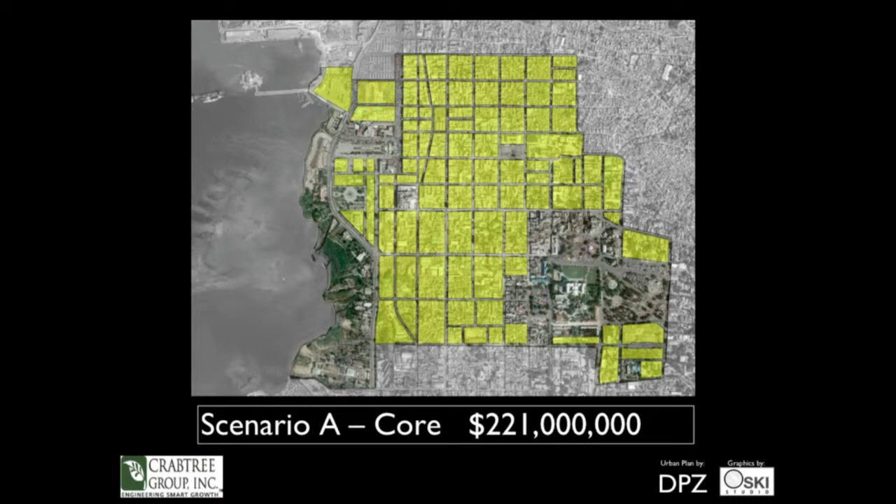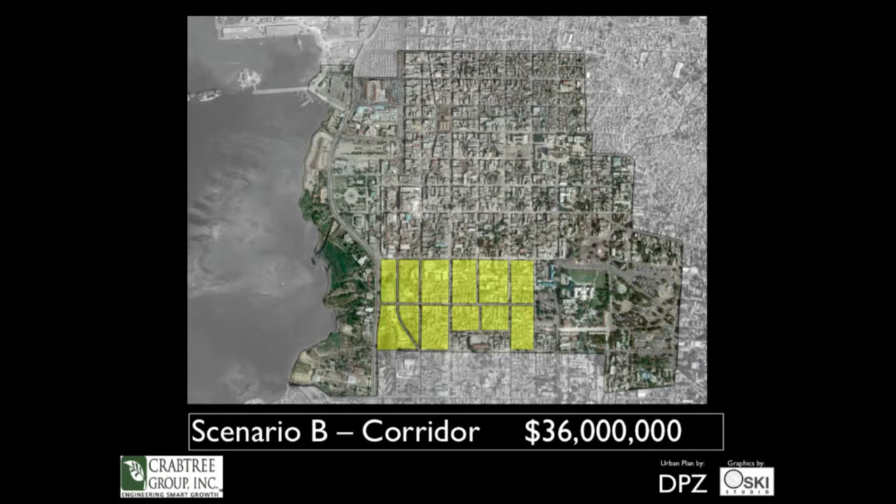We looked at 3 different scenarios, and the first one was looking at the entire urban core of downtown Port-au-Prince, and completely and immediately replacing all of the infrastructure in that immediate core, and the price tag for that was $221 million. The second scenario was to look at just a corridor at a time, and the cost for that was $36 million.

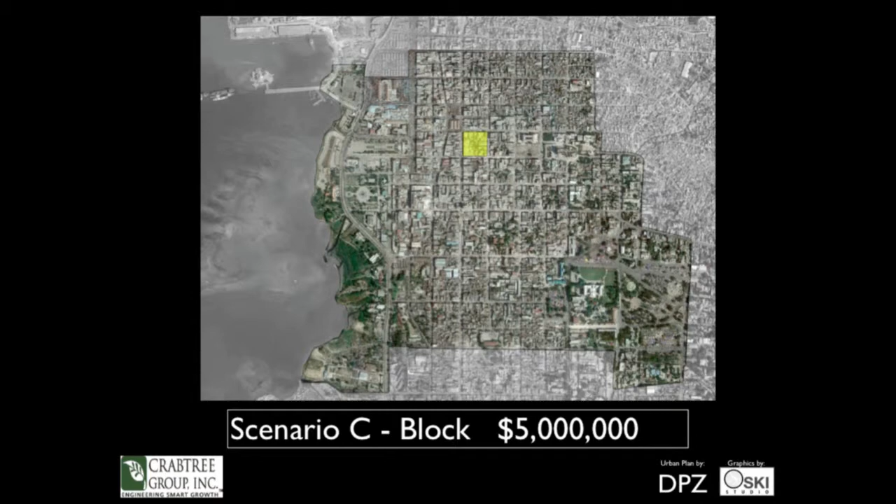Then we looked at the scenario of doing 1 block at a time, and that is, what would it cost to provide self-contained and secure infrastructure, including power, water, wastewater, and drainage for 1 block at a time, and that would be including the perimeter streets, and that was $5 million per block.

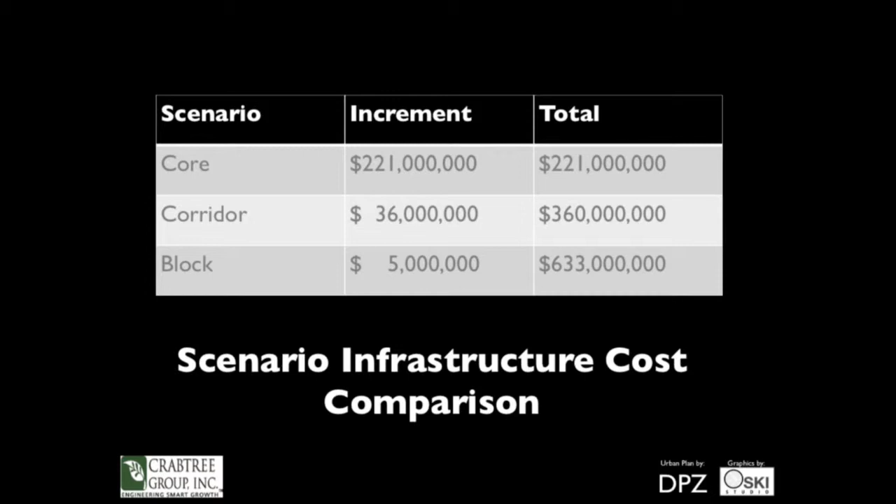So we did a lot of number crunching and comparing scenarios, but in summary, the core scenario was $221 million. The corridor at $36 million per corridor would total to $360 million for the entire project area, and the block would total up to $633 million. Now the preferred scenario was the block scenario, despite these vast differences in total cost.

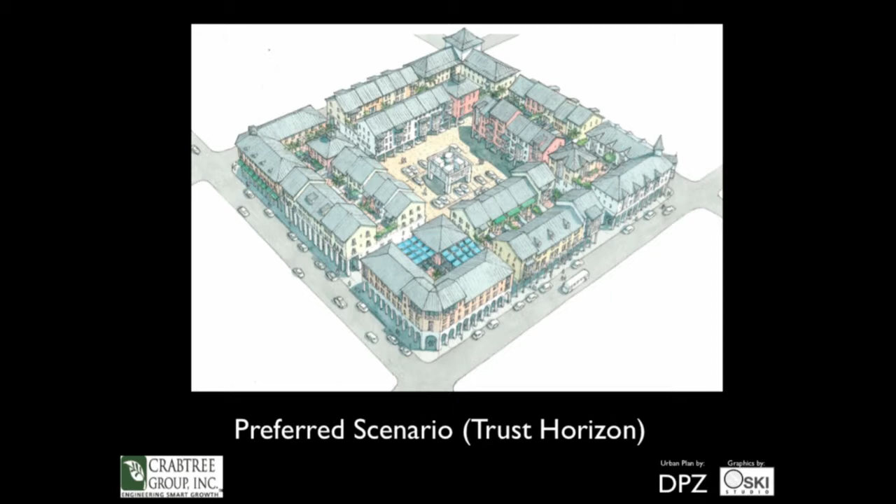And what it included was what we call the green machine in the center that provided all of the infrastructure for that block. And there's about 300 units there. Now the stakeholders liked this scenario because they had trust issues with trusting their vital infrastructure services to a sometimes sketchy government. They also liked the idea of the block as an increment that could be self-organized. And additionally, they thought that the ability to secure the perimeter of the block was an essential attribute of that plan.

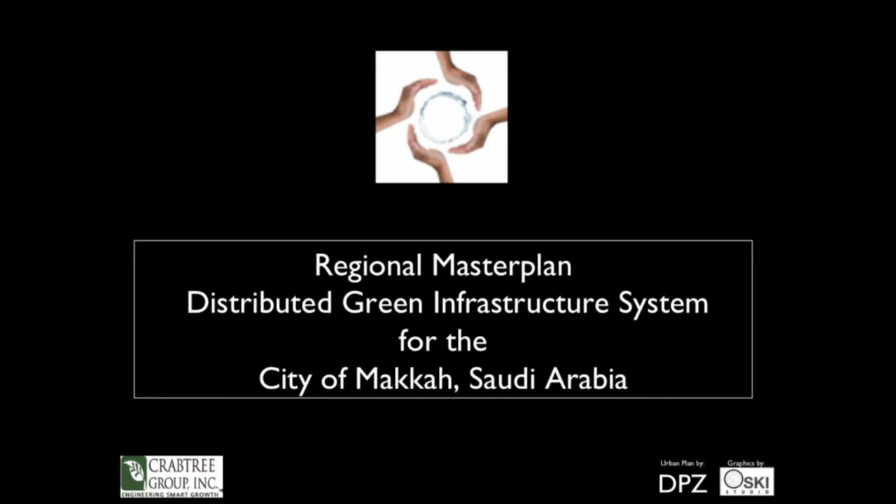Meanwhile, far away in Saudi Arabia, the city of Mecca is experiencing extreme growth pressures and severe housing shortages. And as a member of a DPZ-led team that was commissioned by the city of Mecca, we worked on designing distributed green infrastructure systems for a very large regional plan. This 100 square kilometer addition to the city of Mecca is designed to accommodate a population of 1 million people within 20 years.

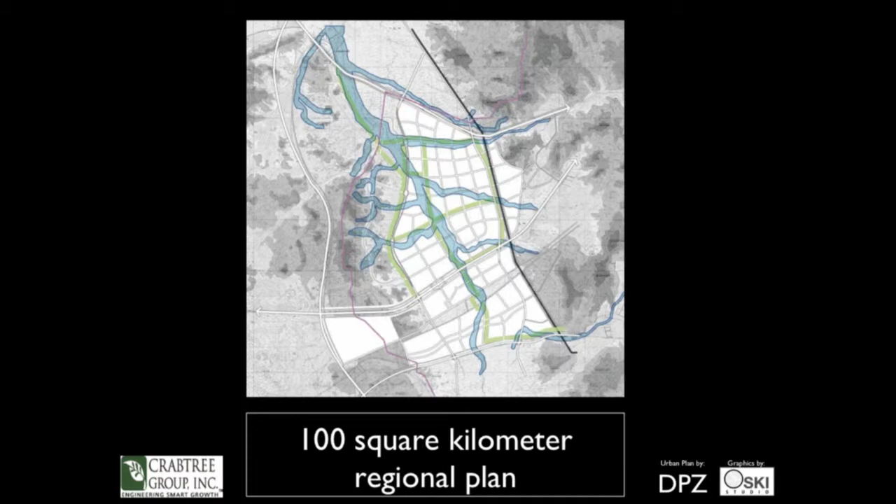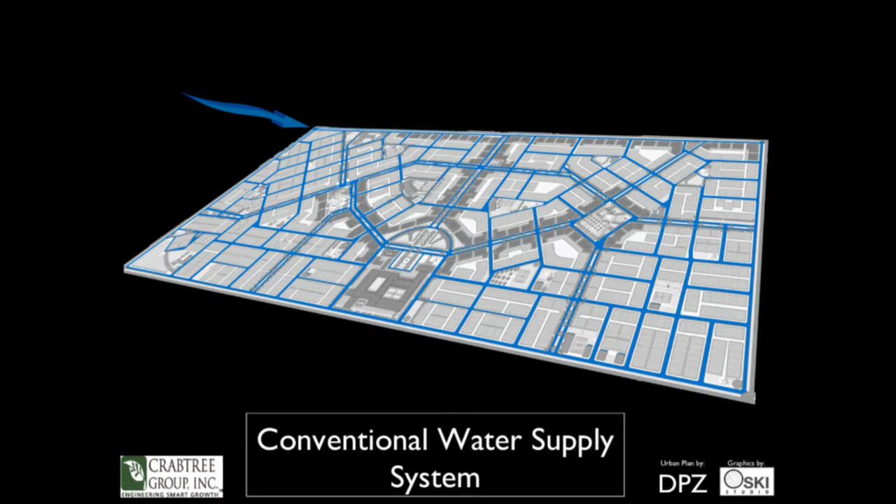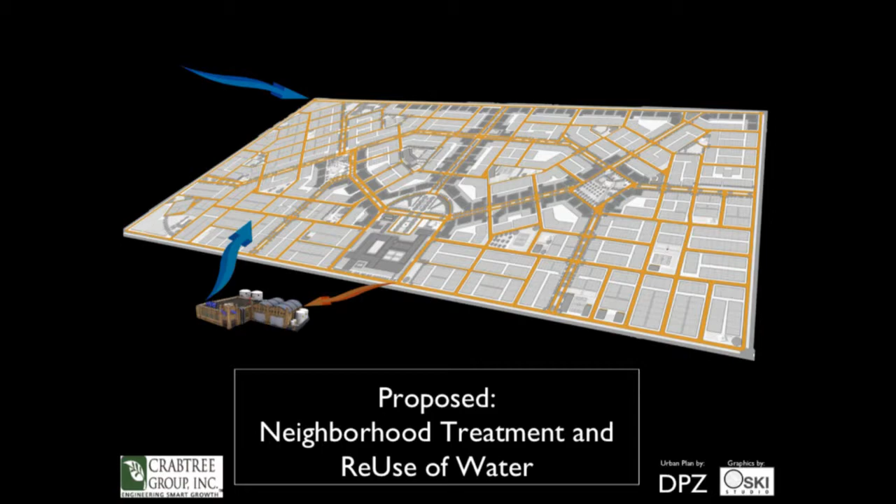And the water supply for this area is desalinated water from the Red Sea that is pumped dozens of kilometers uphill to get to the city. And the conventional wastewater treatment is for all neighborhoods to pump their wastewater to a central treatment plant, and then dump the treated water in what's called a wadi, or a dry creek. What we proposed was neighborhood treatment plants that would treat the wastewater locally, and then it could be reused in the neighborhood.

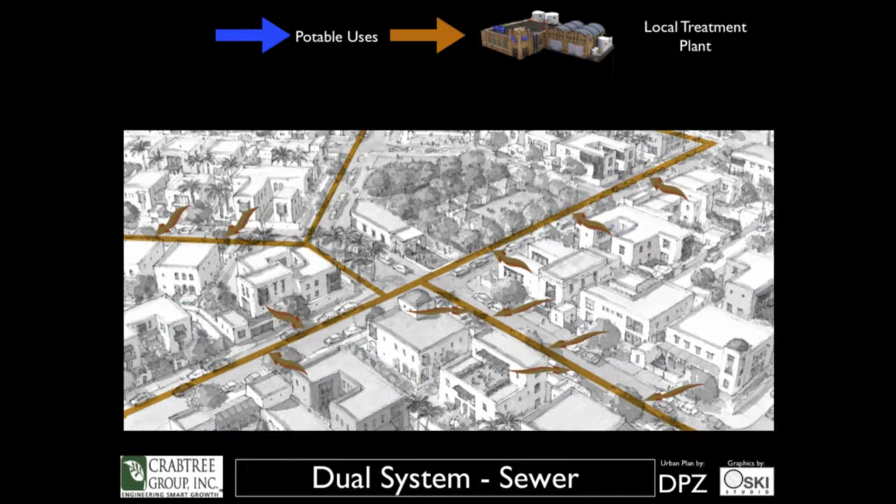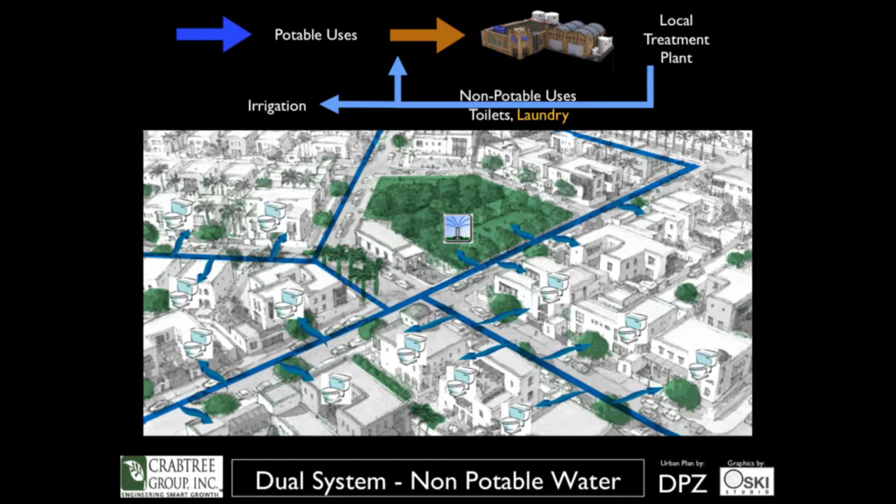So here it is: the desalinated water is used only for potable uses. The wastewater from those potable uses goes to a local treatment plant where it's treated and then returned to the neighborhood in a second pipe system for use in toilets, laundry, and irrigation. This results in a 55% reduction in the use of desalinated water.

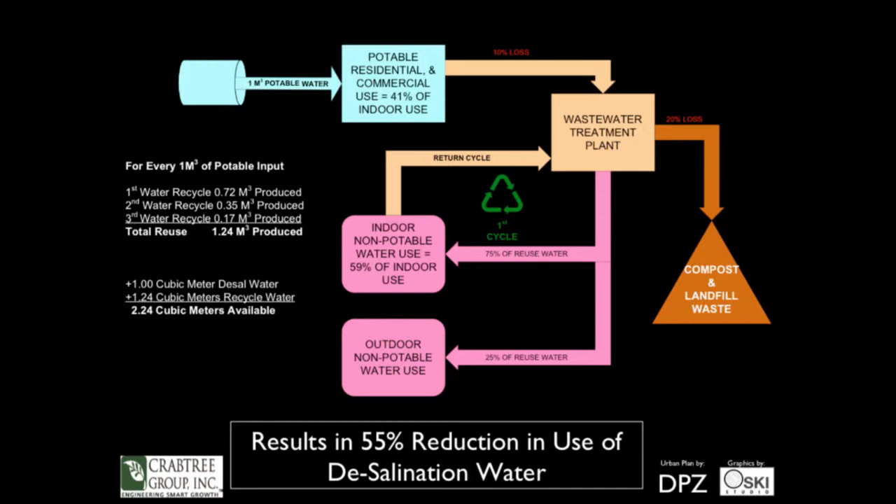We developed a rainwater harvesting street that would further enhance the water cycle. This is an inverted crown street that has bioswales at the edges and a French drain in the center that infiltrate the rainwater to recharge the aquifer. Also, this inverted crown street has enough hydraulic capacity to obviate the need for expensive drain inlets and pipe culverts.

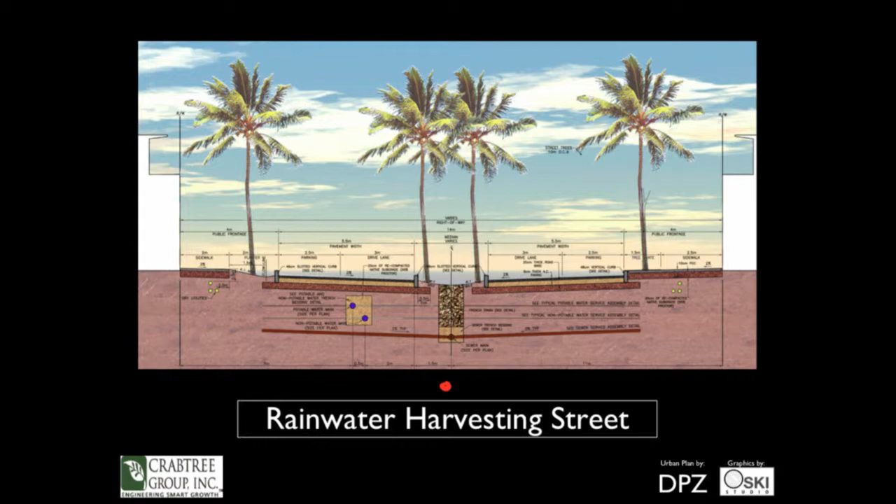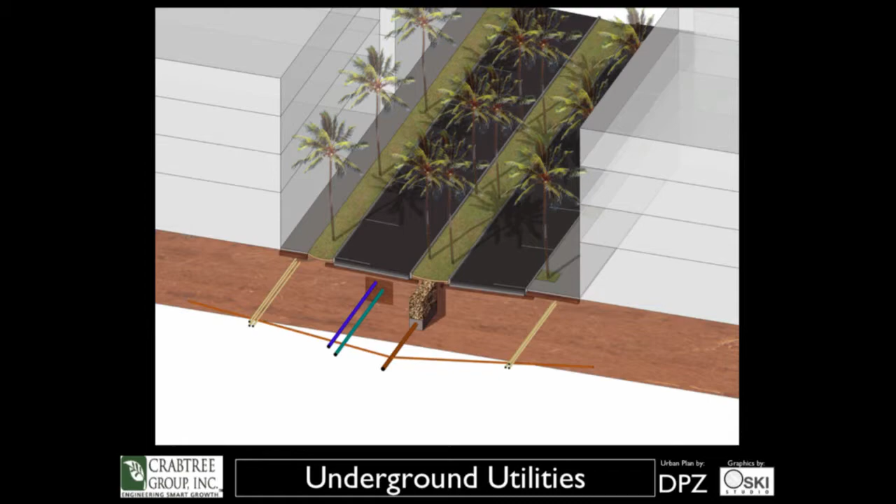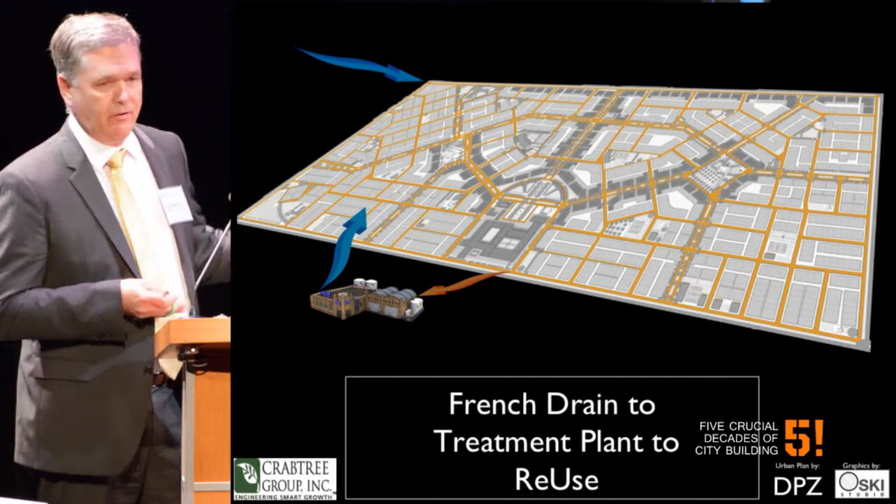So in this cutaway view, you see the dry utilities at the edges, the two water pipes, the sewer pipe at the bottom, and the French drain in the center that actually can be built quite inexpensively because it occupies the same trench that was dug in order to install the sewer pipe. Now, any rainwater that doesn't infiltrate into the aquifer can actually trickle down to the treatment plant where it can then be treated and reused in the neighborhood.

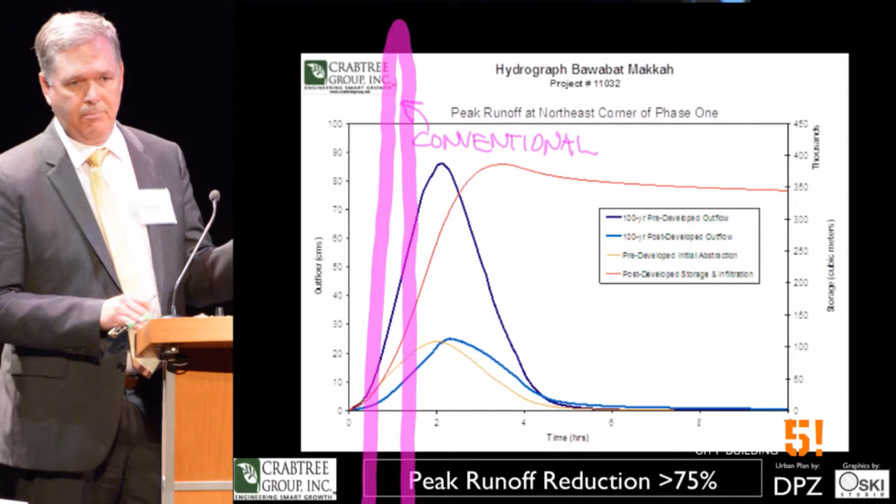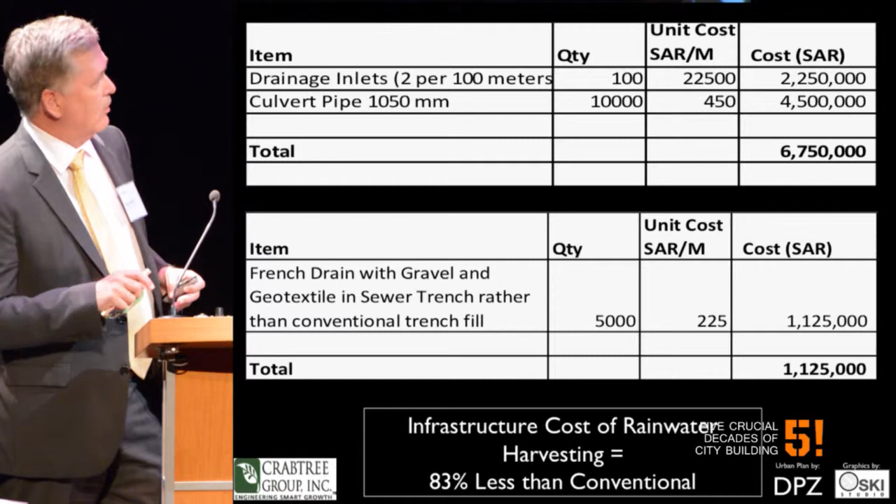Now, this rather distorted image here is a stormwater hydrograph that shows that conventional pipe and dump infrastructure results in large increases in runoff, while the rainwater harvesting streets actually result in a 75% reduction in both peak runoff rates and total runoff volumes. The conventional drainage system with drain inlets and pipes would cost 6.7 million Saudi Riyal for 5,000 meters, while the rainwater harvesting streets would cost 1.1 million, which is a savings of 83%.